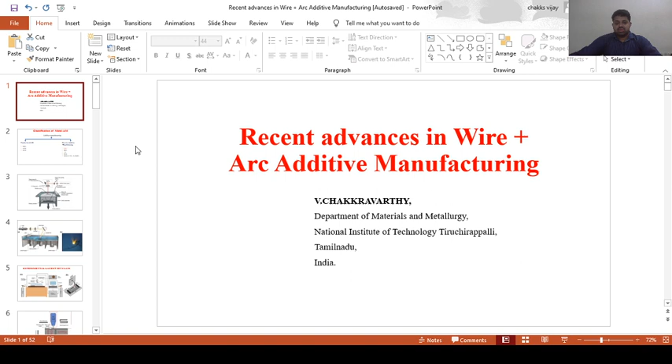This lecture covers fundamental insights into wire arc additive manufacturing, its recent advancements, present challenges, and industrial outcomes. I am V. Chakkravarthy, with the Department of Materials and Metallurgy, National Institute of Technology, Trichy. I'm not going to waste time advertising my institution, so let me quickly step into the classifications of metal additive manufacturing.

Additive manufacturing is just an umbrella term. Metal additive manufacturing is broadly diversified into two types: powder-based additive manufacturing, and wire arc additive manufacturing. Powder-based additive manufacturing, as the name indicates, uses powder.

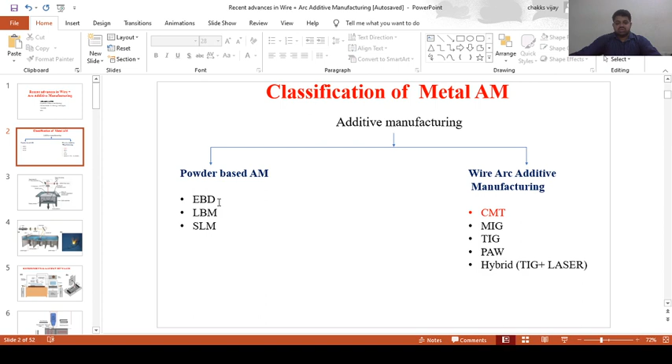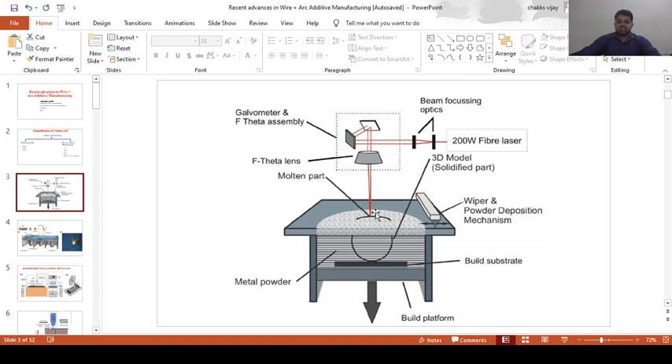A powder is spread over the table, and a laser or electron beam power source is focused onto that powder. Wherever the powder is exposed to this laser power source, those areas get melted and solidified to form the exact component. You can observe that for making a very small component, how much powder is practically needed. This is how powder additive manufacturing generally works.

Out of all these areas, only very few areas are exposed to the laser. Only those areas get melted and solidified, and the remaining areas stay unaffected by heat. However, in the nearby zones, we can observe partial melting of powders, which may cause agglomerations that we cannot rework with that unfused powder. That becomes a potential threat.

So here we go. Now let's see what wire arc additive manufacturing is. The name itself indicates that the wire is going to be melted to form any complex geometry or complex contour.

This is how a setup exactly looks. We need a workbench, and a substrate will be there. Generally, whatever material we are going to deposit, the same material is used as substrate. For example, if you are going to deposit stainless steel 316L, then the same material should be chosen as the substrate material.

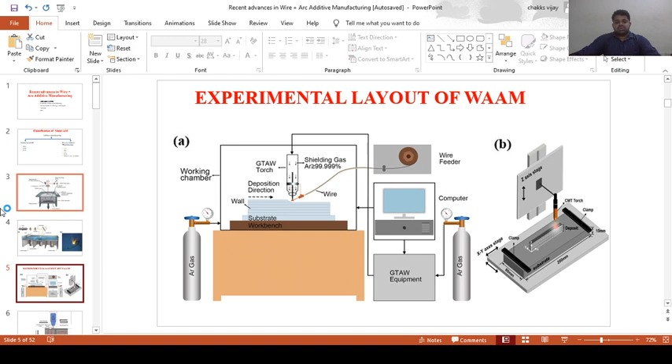The wire feeder can be done externally in case of TIG welding, or if it is CMT or MIG welding, the wire will be integrated into the torch and directly melted without any external power source such as a tungsten rod. We also have a computer to control and monitor the feedback mechanism, ensuring the torch is moving as per the programmed coordinates. This is a general overview of wire arc additive manufacturing.

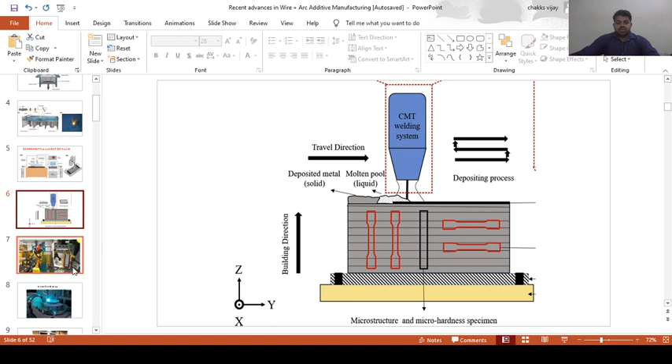Especially while building a component, we should be certain about which axis we are building in, either X direction, Y direction, or Z direction. Generally, single wall components are built in the Z direction, meaning we build towards this height. Here we can see the experimental layout.

Let's see how exactly a wire arc additive manufacturing setup looks. Here we can see cold metal transfer based additive manufacturing. That welding machine is interfaced with the robot. This robotic arm could potentially move in all degrees of freedom.

Here we can observe some base plate attachment. These base plates are clamped with this kind of fixture, so that it can avoid thermal distortion. That will be covered in upcoming slides.

Here we can see a magnified image of how the table exactly looks. In this table we'll be fixing a base plate and clamping it using this kind of fixture, and this wire will be coming through the wire feeder, and directly it will be deposited over here.

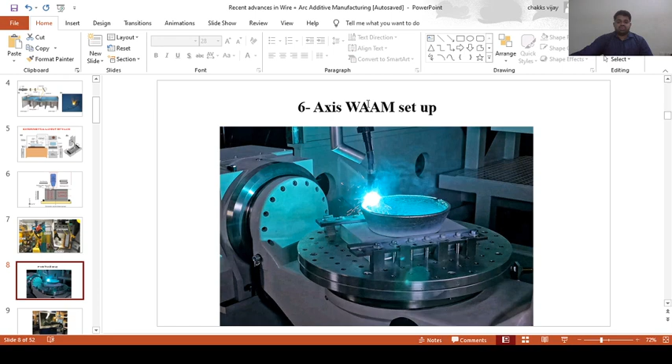In case you are dealing with tough materials like titanium, magnesium, copper, or magnesium aluminum, such sensitive materials, then we have to go for a closed chamber, where this chamber will be completely filled with argon gas or even helium gas at a very high pressure, so that there won't be any possibility of interacting with outside gases, especially during deposition. So we won't face any kind of oxide layer formation, especially at the time of deposition.

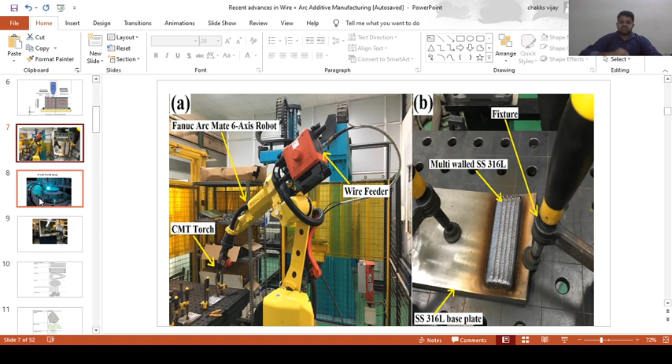Here are the path planning considerations. How a robot is supposed to move, and what paths it should travel. Each path planning strategy will impact grain refinement significantly. This path planning also impacts geometrical fidelity and the heating and cooling rates of the component. The solidification rate is completely dependent upon the tool path planning, meaning in what pattern this robotic arm is supposed to move.

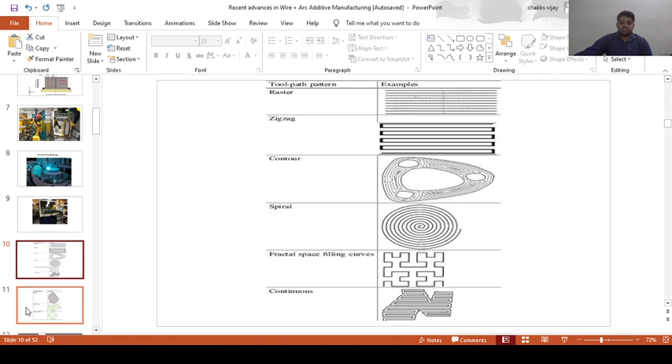There are different patterns available. Either we can go for a raster pattern, which deposits continuously without any gap. We can also go for a zigzag pattern, which is more efficient. There's also variable contouring, spiral, and continuous patterns possible. A few other patterns I've shown include hybrid pattern, MAT, and adaptive MAT.

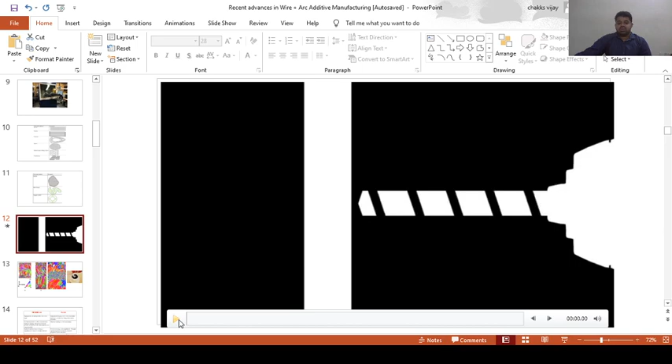Other than these patterns, one of the most interesting things about wire arc additive manufacturing is the weaving motion. Here we can see what a weaving motion looks like.

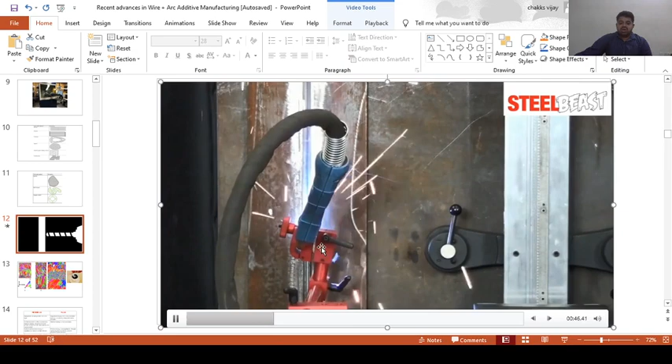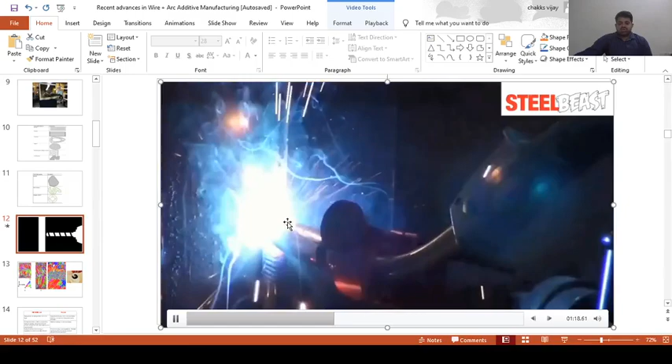Here you can observe that this torch is slightly moving right to left, left to right. This consistent movement can easily be observed. Especially whenever we're making this kind of weaving motion, it eventually causes a weld pool stirring, which results in fine grain formation.

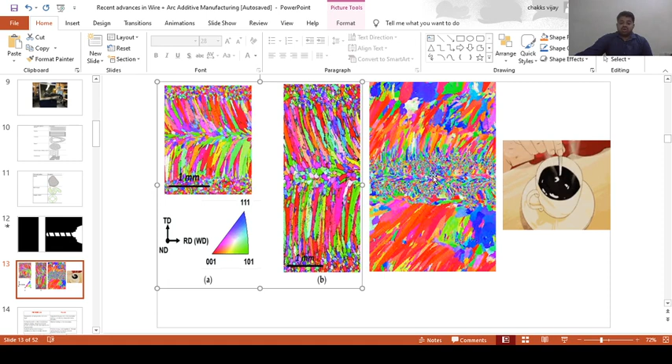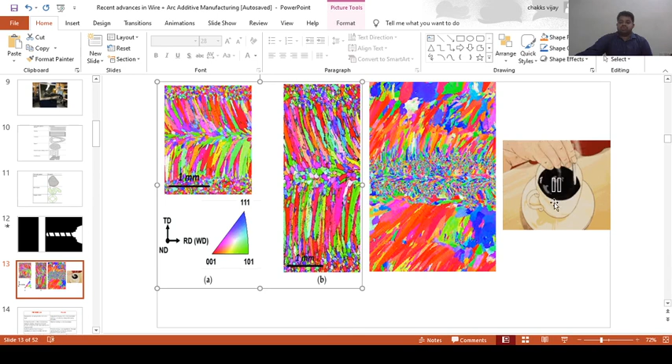Whereas whenever we go for this arc oscillation technique, shown in this video, you can observe that fine grain refinement is possible. This is nothing but weld pool stirring. Whenever you are stirring this molten pool, automatically the grains get collapsed, and it will result in finely refined grains that won't be in one particular texture. That is one of the advantageous features of this weld pool stirring.

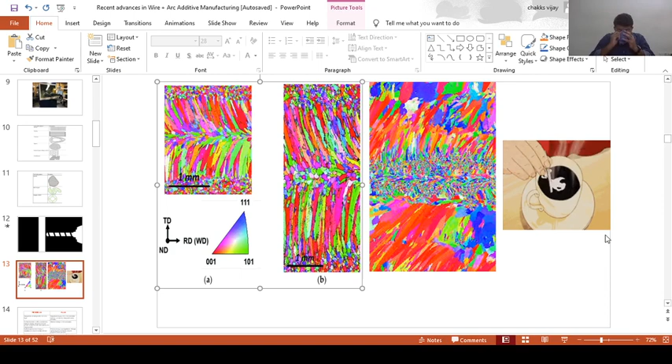Next we can see the common differences between powder based additive and wire arc additive manufacturing. In powder based additive, the cost of the powder is initially very high, and there are aspect ratios specifying what should be the specific diameter of the powder, and in what shape the powder is supposed to be, either spherical or any other regular shape, which matters a lot. As we know, with this powder, porosity will be one of the most common issues.

Whereas when we compare with wire arc additive manufacturing, we generally never bother about grain size or anything else. Whatever material we want to deposit, we can go for any simple material, like stainless steel 316L or Inconel. Anything available in form of a wire, typically we can melt those wires to deposit a component.

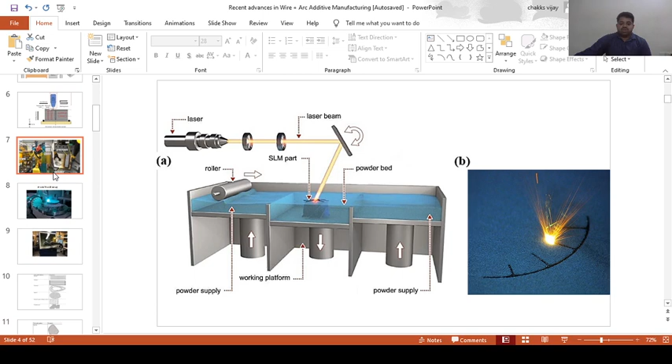So the material wastage is very minimum. Here we have observed that a very large quantity of powder will be spread just for building a very small component, even though your component may be small or big, because you need to stack this much amount of powder. But in wire arc additive manufacturing you don't need that much material, so even a minimal material is sufficient for making a component.

So the material wastage will be very minimum with wire arc, which we generally call the buy to fly ratio, because most aeronautical components are very costly. For example, titanium 6Al4V alloy is a very expensive material, so even a small quantity of material wastage matters a lot.

Buy to fly ratio means what is the actual component weight and how much material is wasted to produce this much weight of component. For example, if you are producing 2 kg, the actual weight of the component is 2 kg, but you would be wasting like 3 kg of powder to produce it, so the total would be 5 kg. That 5 kg is the buy ratio, and the fly ratio is the actual weight of the component, which is the 2 kg.

Another important thing to know is that this powder-based additive manufacturing setup is quite expensive. For example, if we need a very simple setup, we have to spend a minimum of 1 crore in Indian currency. But if you're interested in building a wire arc additive manufacturing technique, we hardly have to spend 50 to 60 lakhs. We can even go for very good 6-axis robotic machines.

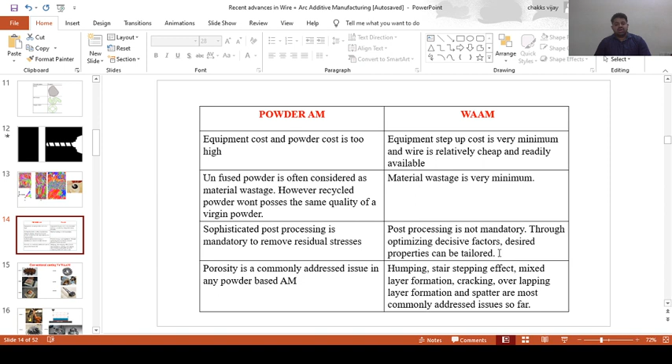But however, just like powder-based additive manufacturing, wire arc additive manufacturing also has some serious problems like humping, stair stepping effect, mixed layer formation, and a few others, which could be seen in the upcoming slides. Let me quickly step into the common differences between conventional casting and wire arc additive manufacturing.

In conventional casting, step 1 we create a pattern, step 2 we create a mold cavity, step 3 we pour molten metal into the mold cavity and allow it to solidify. Once solidified, we break the mold and get the actual component, which will be further machined and polished to meet industrial requirements. This is how conventional casting generally happens.

But here, wire arc additive manufacturing is something very different. In casting we have a static heat, this heat is not a moving heat, which is otherwise called transient heat.

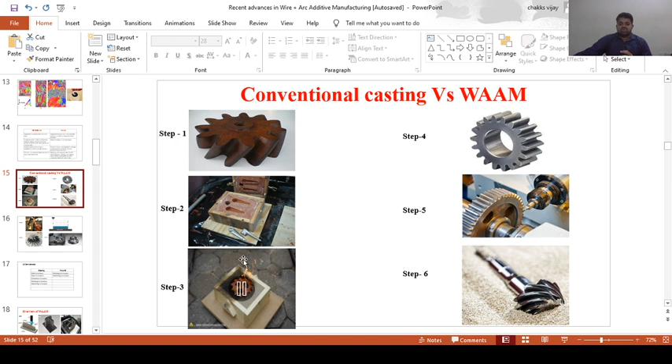In casting it is a static heat, whereas in wire arc additive manufacturing it is a transient heat, especially while depositing from one end to the other. As the torch travels, this area gets solidified while experiencing a moving heat, which is otherwise called transient heat. So the solidification rates are a little bit faster as compared to conventional casting techniques.

Step 1, we have to plan the robotic path. Once we have planned the path and set up all the x, y and z coordinates, then we'll be depositing the component, which is step 2. Step 3, we'll be removing the unwanted components, because this component has a lot of undulations that should be removed.

Most components could be used in as-printed condition, but few components may have a very stringent industrial requirement to pass through qualification. In such circumstances the component could even undergo machining, either by drilling or milling tools, or wire cut EDM, which is one of the most conventionally and often used techniques to machine these wire arc additive components. Even that could be possible to attain a high geometrical fidelity of a component like this.

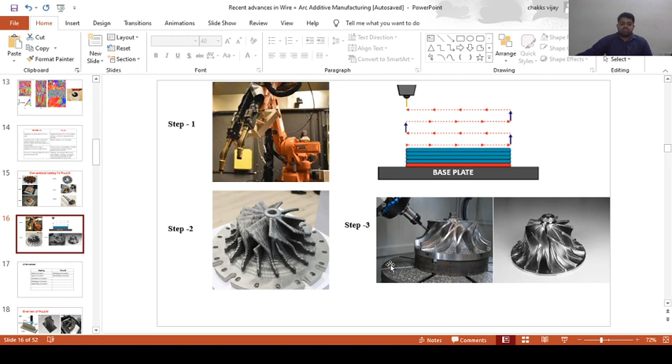So only these 2 allowances are generally considered for a wire arc additive manufactured component. Here we can see the overview of WAAM.

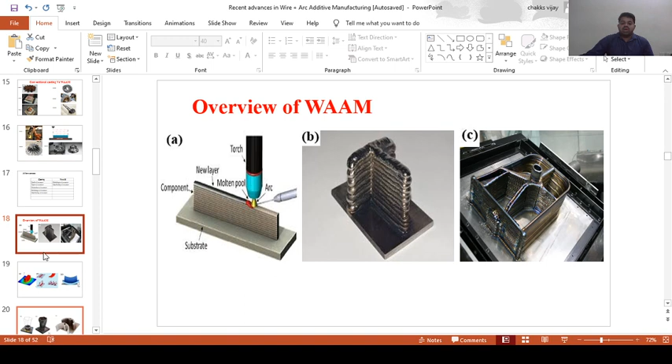Then the next step is building a component like this. After we have built this component, then we'll be doing machining as shown here. But before doing all this process, what is the first step we are supposed to do? First, we are supposed to do the simulation. Before building an actual component, we have to simulate how the heat source will be moving, and what is the possibility of evacuating the heat from the actual component.

It is nothing but the substrate, or otherwise called base plate, which is blue in color here. Generally whenever metal is being deposited, the component undergoes high coefficient of thermal expansion and thermal contraction, which leads to building of residual stress complications. Whenever the material is being melted, it experiences high coefficient of thermal expansion, and during solidification the metal experiences thermal contraction.

Repeated melting and solidification takes place, forming thermal induced stresses in the base plate, which may lead to base plate distortion. This is the most common problem, but it could be avoided by using a base plate that is slightly thick enough, minimum 15 to 20 mm thick. Because the plate is initially at room temperature, 32 degrees C, and suddenly exposed to very high heat like 1600 or 2000 degrees C, it cannot withstand that thermal shock, leading to residual stress complications and plate distortion.

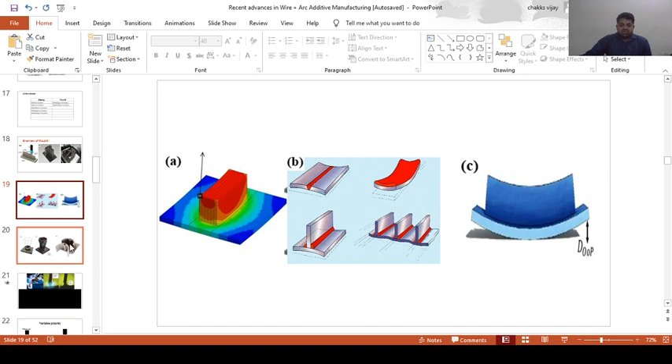After doing simulations, we have to do pilot experiments. Using these pilot experiments, we can plan how to optimize the wire feed speed, how to optimize the current, what should be the applied voltage, and what should be the torch traveling speed. Each and everything should be well optimized, either manually or through programming techniques.

Prior to that, what we generally do is 3D slicing, where the exact geometry is sliced into small segments. After that slicing, we do a modelling process. Then we come up with a simulation, and if that works exactly, we go for pilot experiments.

During pilot experiments, we may end up with spatters and irregular deposition. Each time, we optimize all the process parameters. Once all the process parameters are well optimized, we get a very fine component with very high geometrical fidelity.

Once we fabricate this component, it is machined very smoothly to attain a glossy surface. On seeing the surface initially, we cannot blindly conclude that wire additive manufacturing doesn't work; we should not jump to that conclusion. After machining, this component will look just like a brand new one.

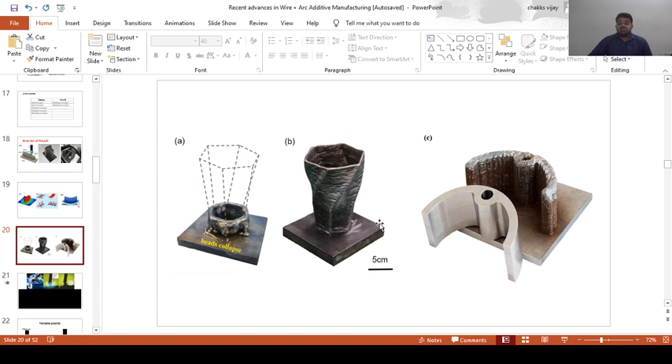As mentioned, after doing a lot of pilot experiments, we optimize the process parameters. In case of normal MIG, a conventional MIG process, we optimize the process parameters manually. Whereas cold metal transfer welding, which is a modified form of MIG welding, was developed by Fronius Technology.

This technique offers more versatility, especially for wire additive manufacturing and welding. The main salient feature of cold metal transfer welding is that each and every process parameter is synergistic in nature. For example, if I change the wire feed speed, the voltage, current, and other decisive factors will automatically change accordingly.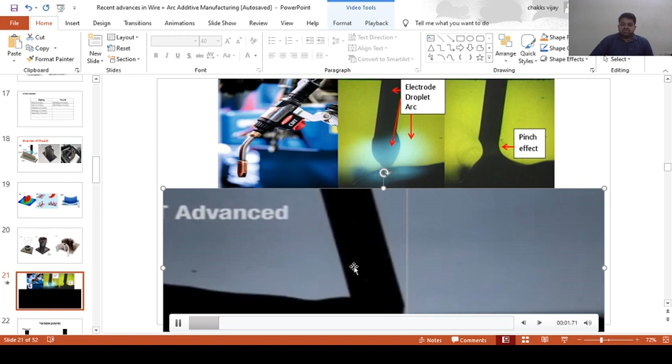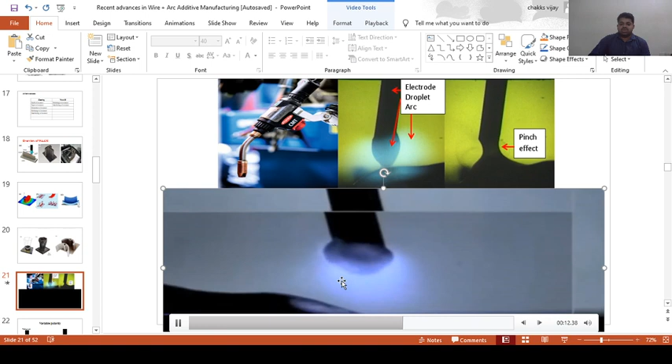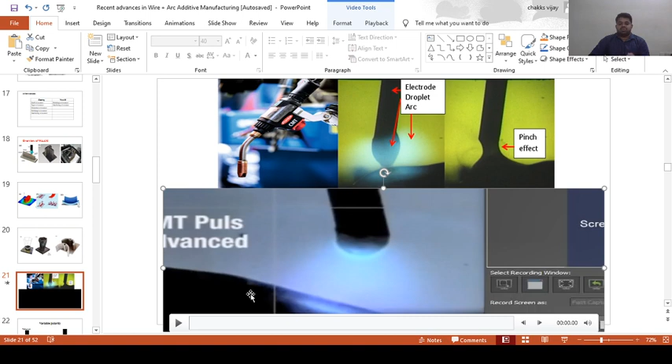Okay, so here you can see this wire is connected with the negative terminal, so it will be like detaching a droplet because an avalanche flow of free electrons will be coming out from the wire, which will result in molten pool formation. So for each and every microsecond, this molten droplet will be detached from this wire, which could be easily seen, and each time this polarity is getting changed from positive to negative and negative to positive.

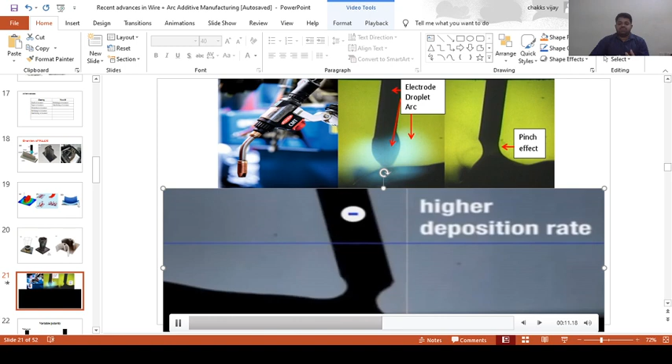So I'll let you know what is the actual reason for this kind of pulsing effect. In cold metal transfer welding, this pulsing will be more efficient, unlike other welding techniques. So this is what we generally call variable polarity, like straight polarity and reverse polarity at a time, we can make it out.

So in terms of welding, just imagine this is a CMT torch, and this is a wire, and this is a base plate. Say for example, if this wire is connected with the positive terminal and the workpiece is connected with the negative terminal, and if I'm going to make a deposition, then automatically what will happen? This workpiece will be having some oxide layers which I could not potentially remove through the wire brush. If I'm removing through the wire brush, then it may lead to scratches or undulated surfaces, which I don't like to happen. I like to remove all these oxide layers at an atomic level.

So what I'll be doing is connecting it in reverse. I'll be connecting this workpiece with the negative terminal. Wherever I have connected anything with the negative terminal, the free electrons will try to jump out. So this free electron - generally the oxide layer will be deposited on top of the surface. These free electrons want to jump outside, but this oxide layer creates a hindrance. So what will happen? A hammering effect will take place. So just consider this oxide layer - the free electrons will give a hammering effect, and try to jump out from the surface of the metal, which will lead to the removal of the oxide layer.

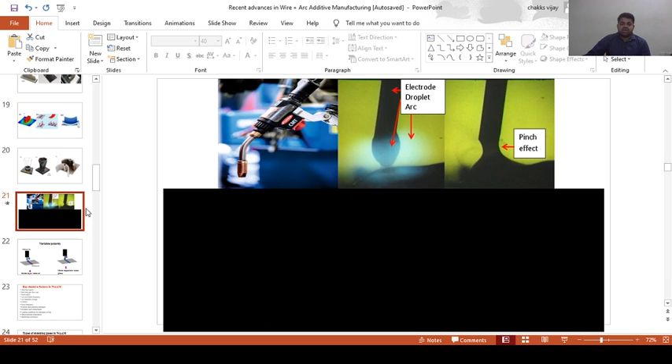So everything happens in microseconds, which we generally call pulsing. So in one half of the cycle, deposition is made, and in the other half, oxide layer removal is taking place. Whenever the workpiece is connected to negative, oxide layer removal takes place, and whenever the electrode is negative, metallic deposition takes place. So for every microsecond, one half of the wave is metal deposition, and the other half is oxide layer removal. So two things occur in parallel at a time, which we generally call pulsing.

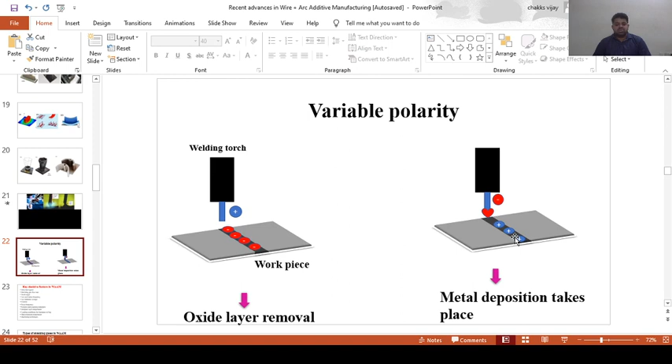So this CMT, cold metal transfer welding, has a very special feature called pulsed advanced mode. Using this pulsed advanced mode, you can avoid porosity, and also deposit spatter-free material, and also remove the oxide layers, especially at the time of deposition itself. So that is another advantage of the process.

So here we can see what are the key decisive factors of wire arc additive manufacturing. The first thing we have to worry about is the wire feed speed - how much should we fix it? In case of cold metal transfer welding, once we fix the wire feed speed, all the other decisive factors will be fixed accordingly. Whereas in case of other techniques like plasma or MIG, we have to fix each and every process parameter ourselves, by doing manual optimization or well-developed optimization techniques. So that's wire feed speed.

Then the second most important one is the shielding gas flow rate. Then the third one is the torch angle. This shielding gas flow rate is very important, because if you are using a shielding gas with a very low flow rate, then it would not be sufficient to shield the molten pool. So obviously the weld puddle will result in oxide layer formation. If it is a more sensitive metal like aluminum or titanium, then shielding gas is very important - the metal will have discoloration. The metal color will get changed to chocolate brown, which indicates that an oxide layer has already formed.

If for each and every time we cannot simply remove by means of a wire brush, which is very time consuming, we generally have to give a very high flow rate, like 20 liters per minute. In that kind of high shielding flow rate, we generally go for that.

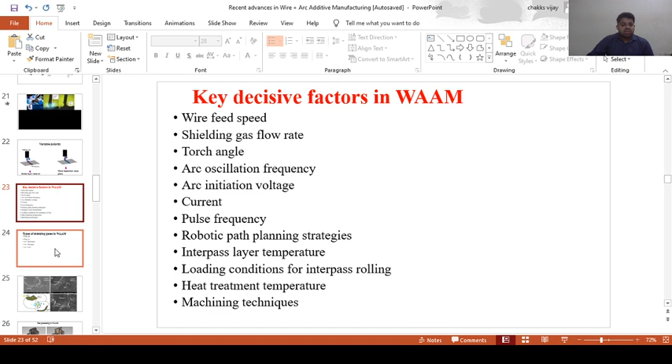So here I have mentioned what kind of shielding gases we generally employ. Either we can go for pure helium, or argon, or argon hydrogen mixture, or argon nitrogen. These are generally classified as metal active gases, because hydrogen, nitrogen and CO2 are the most active gases as we've heard.

How much hydrogen can we use? Generally we can go for 1 to 5% of hydrogen along with argon - argon will be 95% and hydrogen within the range of 1 to 5%. Nitrogen also would be at the same level, and even CO2 also at the same level.

And this argon nitrogen - what is the use of argon nitrogen, especially when we are using austenitic steels? Austenite phase is a very unstable phase, so austenite may convert into ferrite. So we may use a lot of austenite stabilizers such as nitrogen - nitrogen is a very good austenite stabilizer - or nickel. In certain circumstances, nickel is a very strong austenite stabilizer.

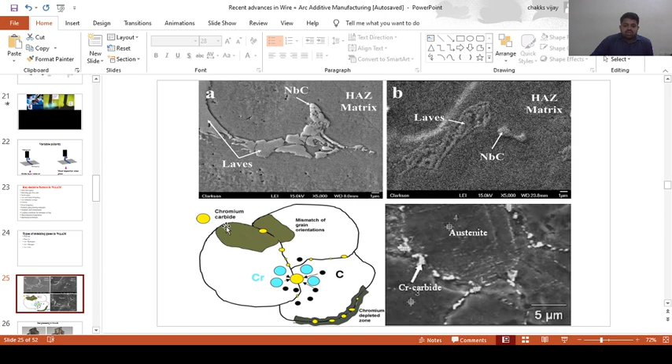Here you can see the metallographic structure. Especially in scanning electron microscope, we can observe each and every single grain boundary. This is a grain boundary you can observe, which is the outer area. Inside is the grain, and the outer one is the grain boundary.

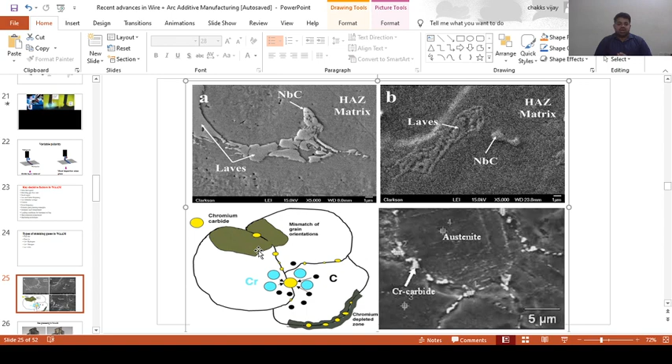Especially during solidification, whenever solidification is very sluggish - as compared to powder additive manufacturing, wire arc additive manufacturing solidification is very sluggish. For example, if you consider powder based additive solidification rate, it will be in the range of 10 power 6 or 10 power 5 Kelvin per second, because very high heating and cooling rates take place. Whereas in wire arc it is quite sluggish, hardly 100 to 500 Kelvin per second, not more than that. During such circumstances, the grain becomes more coarsened.

When grains become more coarsened, what generally happens? Just imagine chromium is present all over the grain. Some quantity of chromium will be leached, and this chromium will form a globule and react with the carbon to form chromium carbide. This chromium carbide is an unwanted element which causes a lot of deleterious effects, such as embrittlement - your material will turn brittle, and wherever chromium carbide formation is present, it acts like a crack nucleation site, so cracks can easily penetrate from there. That's why we generally avoid chromium carbide formation, which is popularly called the sensitization problem.

If we want to potentially avoid chromium carbide formation, we have to use certain shielding gases like argon nitrogen. When we use argon nitrogen, this nitrogen reacts with the carbon because the reacting temperature is very high, forming nitrocarbides. Once nitrocarbides are formed, there won't be any free carbon left to form chromium carbide. So when chromium remains high in your stainless steel, it becomes more corrosion resistant, and you won't face this sensitization issue. So shielding gases are one of the most important considerations.

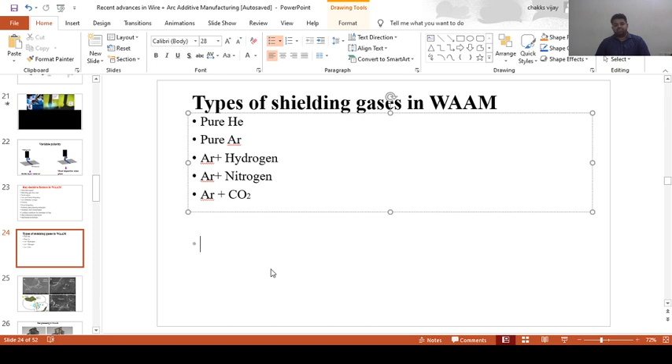Here we can observe this kind of Laves formation. This Laves formation is nothing but a hard niobium shell, inside an irregular L-shaped shell. Inside this shell, a lot of potential minerals are entrapped, like molybdenum, chromium, and even few other materials entrapped inside this hard martensite shell. Obviously it leads to demineralization, which may cause easy corrosion attack.

This could be avoided by increasing the cooling rate of the material. If you want to increase the cooling rate, we can either pour liquid nitrogen into the molten metal so it gets rapidly solidified, or else pass external air so that these wire arc additive components can be easily solidified through faster heat dissipation.

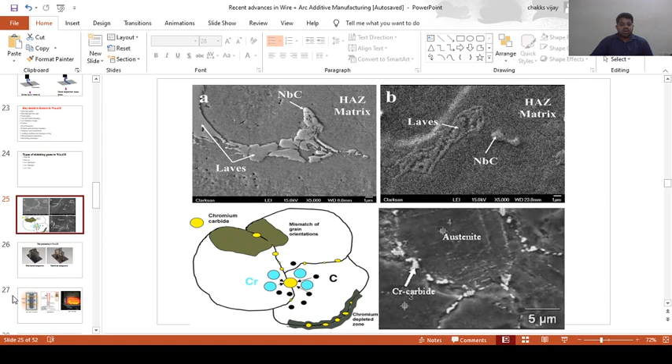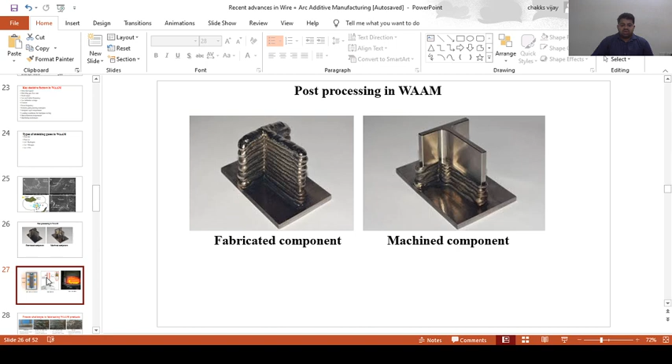Then mostly we never go for any kind of heat treatment, especially with wire arc components. But however, if we go for very high heat input, there may be chances of residual stress formation, which may be due to the building of very high thermal gradient.

So in certain circumstances we generally go for hot isostatic pressing, but this is restricted with wire arc, because most articles mention there is no appreciable effect of hot isostatic pressing with wire arc additive components. However, this is more effective with powder based additive components.

Then the other important thing is shot peening. In this technique, an ultrasonic transducer will be hitting the workpiece, which is like a hammering effect. Due to the shot peening effect, a lot of the open porosities get closed, so a lot of compressive residual stresses build up in the component, which is more favorable for tribological and corrosion resistant applications.

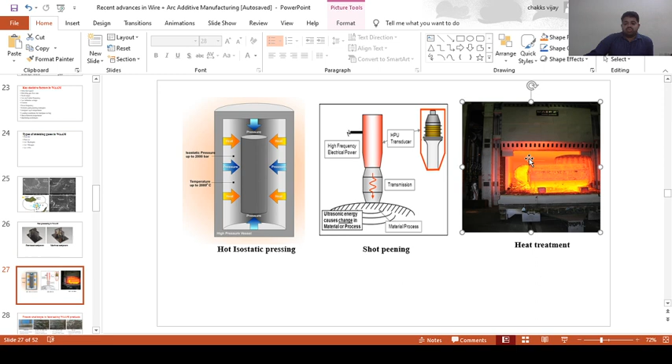Then the other important thing is heat treatment. We generally carry this out in a furnace to certain temperatures, which is also one of the post-processing techniques we often do to remove the residual stresses present in the component.

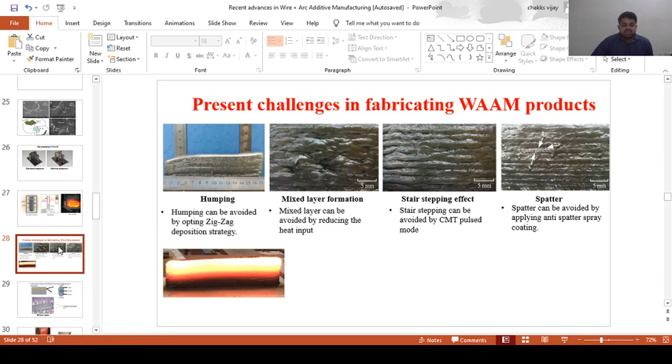Either we can go for rolling operation, or else we can go for a small coating of materials like niobium, or use a grain refiner such as titanium. Such powders could be coated by means of a paintbrush or something else at the end of each layer deposition, so that grain coarsening could be greatly avoided in the dilution zone, because titanium is a very strong grain refiner, which will increase the surface wettability and promote the solidification rates, which will catalyze that.

So generally we go for niobium or titanium nitride. These are the potential grain refiners we can use. We can simply coat these potential grain refiners, especially at the end of each layer deposition. After the end of each layer deposition, this titanium nitride is coated, and again this deposition is made. So especially at the interface area, we will be having fine grains.

Here I have shown what are the various grain structures available. Most metals fall under these four categories: either planar, cellular dendrite, columnar dendrite, and equiaxed dendrite, or else pure planar, cellular, columnar, and equiaxed. Generally it falls under these four categories, or sometimes this dendrite formation might be unavoidable. It is completely based on what is the thermal gradient to the growth ratio.

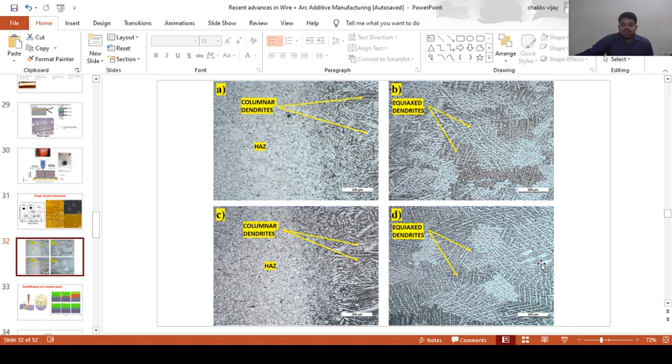I will show you exactly how an equiaxed structure will look - so here you can see now, this is how an equiaxed structure will be looking. Columnar dendrites will appear in this way, here in this diagram you can see some columnar dendrites. This is how a cellular morphology will be looking - here you can see now the cellular morphology. This is how a typical microstructure exactly looks.

Here you can observe the equiaxed structure, here you can observe the columnar dendrites, and the cellular structure we can observe over here. So it is based on the heating and the cooling rates, based on the thermal gradient to the growth rate. Growth rate is nothing but the grain growth velocity. Based on these two phenomena, we will be getting a variable grain structure.

Grains, like every plant, will try to grow towards the sunlight. If the sunlight is at a 30-degree incline, plants will grow in that particular direction. If the sunlight is straight, the plant will grow in a straight line. These grains are very similar to that.

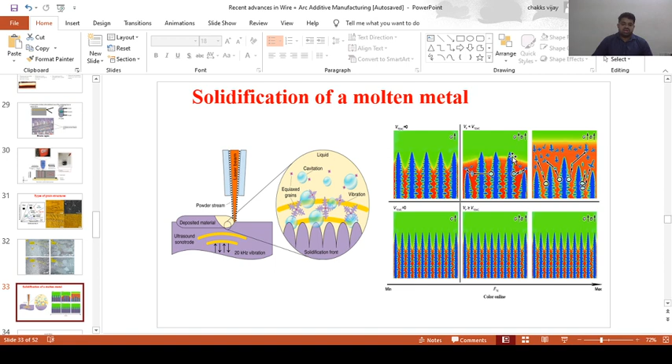Wherever the heat dissipation rates are very high, in that particular direction your grain will try to grow. So it's up to you in what direction you are planning your grain to grow. You have to cool your sample rapidly in that direction, so the grains will try to grow in the fastest heat dissipation direction. That's one of the most important things I'd like to touch upon.

This orange area represents semi-molten state material, which we generally call the mushy zone. This orange area, the mushy zone, will eventually get solidified. This is how a microstructure generally looks.

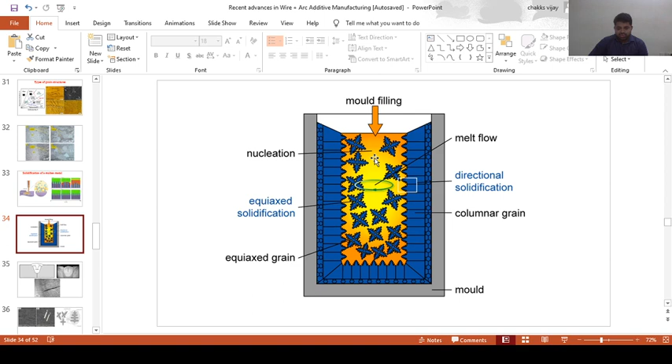Generally, if we are using aluminium, we go for an aluminium silicon wire to weld aluminium. Why? Because silicon reduces the melting point of aluminium and improves surface wettability. Better surface wettability results in more interdendritic liquid formation, and when there is more interdendritic liquid, it can potentially heal all these cracks and voids very effectively.

That's why we generally go for aluminium silicon wire, like ER4043. ER represents the electrode wire, and 4043 is the aluminium 4043 series, known as a universal filler wire. For welding any grade of aluminium, we go for ER4043 because its aluminium silicon combination improves surface wettability, making the interdendritic liquid content very high so it can heal all cracks and voids.

If your material has insufficient interdendritic liquid in this orange zone, it may lead to this kind of cracking formation. To avoid that, we need more surface wettability, so we can go for titanium, which improves surface wettability, or titanium nitride, or even niobium, which also improve surface wettability. We can use such potential heterogeneous nucleates as grain refiners.

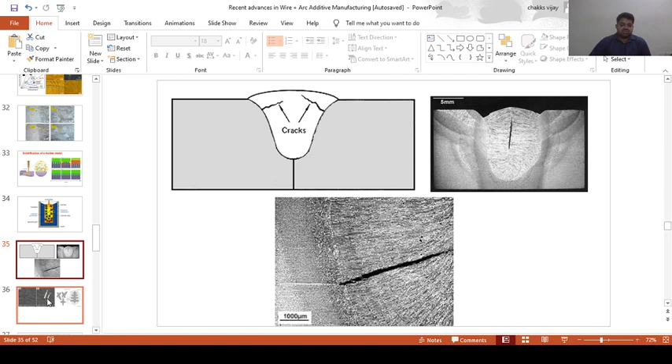How do we predict the cooling rates in wire arc additive manufacturing components? That's one of the important hot topics—by means of secondary dendrite arm spacing. As I've told you about the various grain structures like columnar, dendrite, planar, and cellular, mostly this columnar dendrite structure will generally be present.

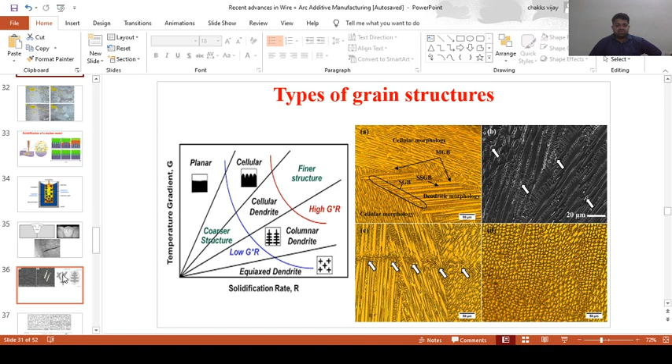If the arm spacing is very high, it means the solidification rates are very sluggish because your grains are overgrown, which is why the arm spacing becomes high. But if the arm spacing is very congested, say around 10 micrometers or 5 micrometers, it means your grains are very fine in size.

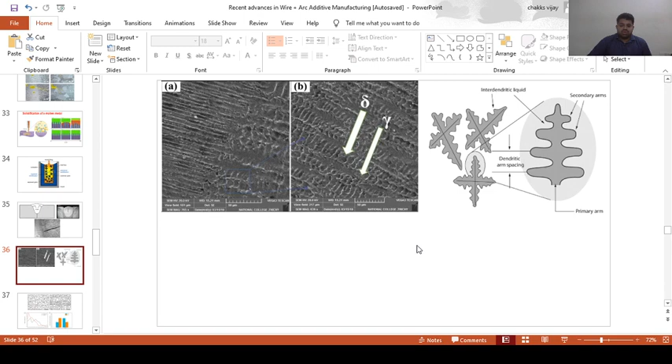Based on the secondary dendrite arm spacing, we generally determine how far the solidification rates are. Just for knowledge, I included this slide to show how far this grain refinement could be possible.

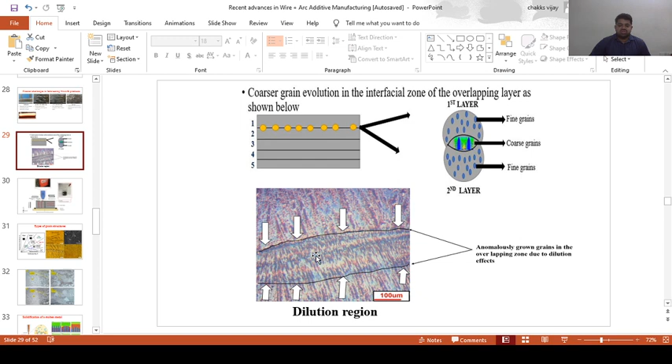Especially at the interfacial region, you can observe this kind of coarser grains. Here, the interfacial region is there, so in the interfacial region, coarser grains are developed.

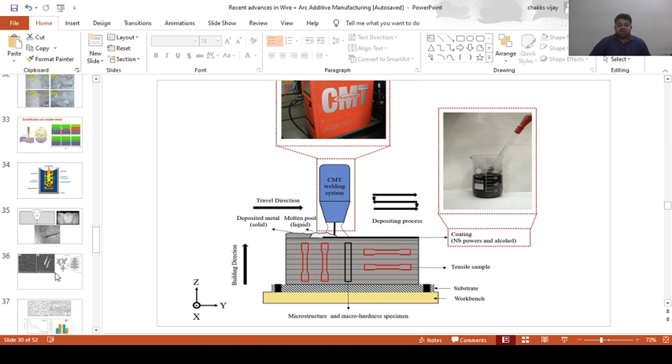So whenever we are using this kind of niobium coating or something else at the end of each layer deposition, you can avoid this coarsening effect. Here you can observe at the interface a fine grain configuration, especially at the interface area.

So this is the interface. In the interface also, coarser grain only is there without niobium powder. After depositing each and every layer, if you are depositing this niobium layer, then obviously the interfacial zone will be having fine refined grains. That is one of the key advantageous features.

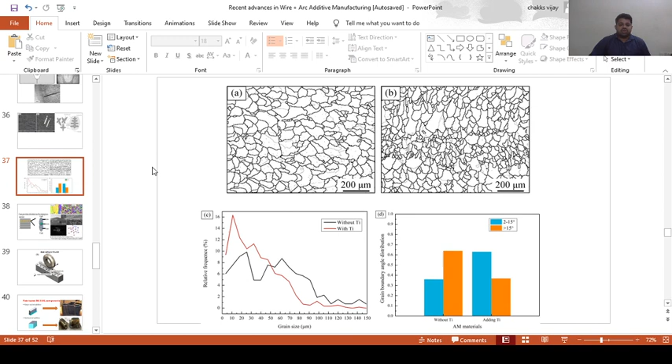This titanium is one of the most potential grain refiners, as I told you earlier. It is pure aluminium. If you are adding a few quantity, just like 1% or 2% of titanium, then all the coarser grains are getting refined into a finer grain.

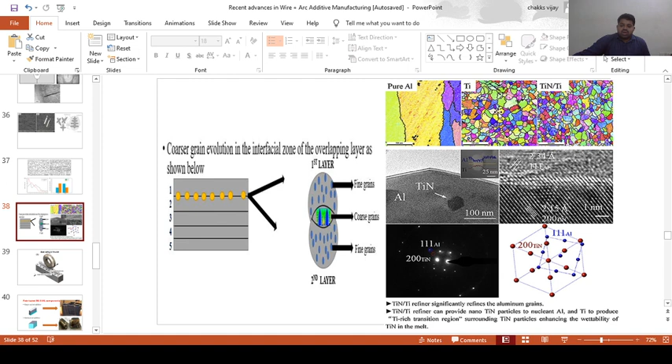If you are using titanium nitride, which has very strong potential heterogeneous nucleation, it can refine very fine grain. So that could be possible. Either we can use this kind of grain refiners, or else we can go for this kind of rolling operation, which I was supposed to discuss earlier, but this slide came a little bit late.

So this rolling operation, after the end of each deposition, will be performing this kind of rolling operation by applying a very high rolling pressure like 80 kilonewton, 100 kilonewton, 200 kilonewton. We will be applying a very high rolling pressure, so that without any kind of grain refiners, this kind of grain refinement can be possible.

Especially during cold rolling operation, the coarser grains will get crushed, and it will be forming a very fine grain structure. However, one of the most important things is this roller will be dissipating the heat, especially from the deposited area, so faster heat dissipation could be possible, and even coarser intermetallics could be broken into finer fragments, so grain refinement could also be made.

But one of the most important things which we should consider is that giving excessive rolling load will lead to tearing of layers. So only optimal rolling load should be applied. That should be given more significance.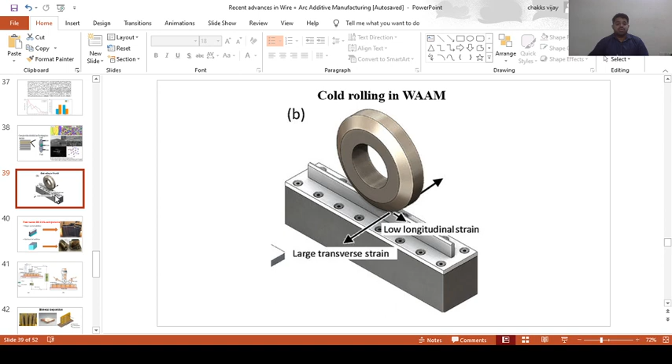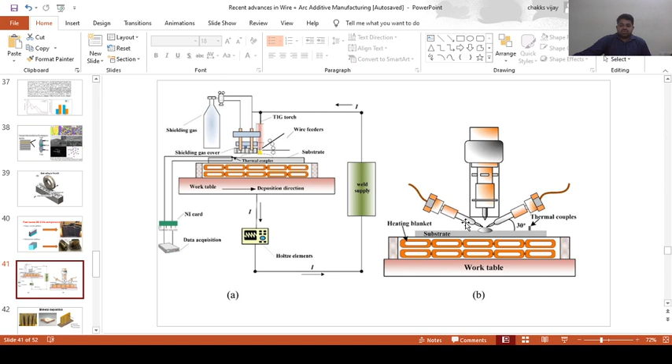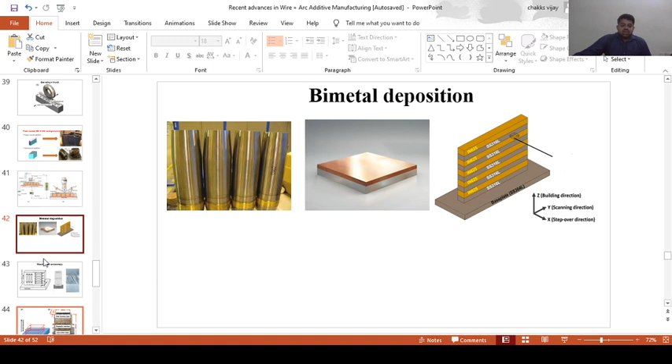Then one of the most important points we should know is mechanical anisotropy. Anisotropy is a common term, meaning change in any property with respect to direction, which we generally call anisotropy.

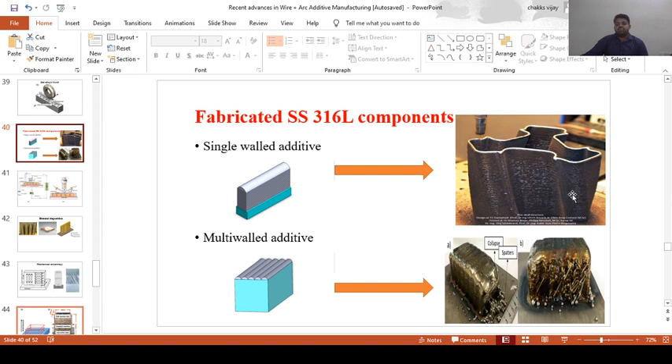Equiaxial morphology will have the highest micro hardness compared to other grain morphologies. So with different grain morphologies present, we get variable mechanical properties, variable corrosion resistance, variable micro hardness, and other variable properties, generally based on what kind of grain morphology we have obtained.

Generally we will get a mixed structure, not everywhere equiaxial or everywhere columnar dendrite. So everywhere it will be a different grain morphology, which results in this kind of mechanical anisotropy. If we want to overcome this, we have to play with the deposition strategy.

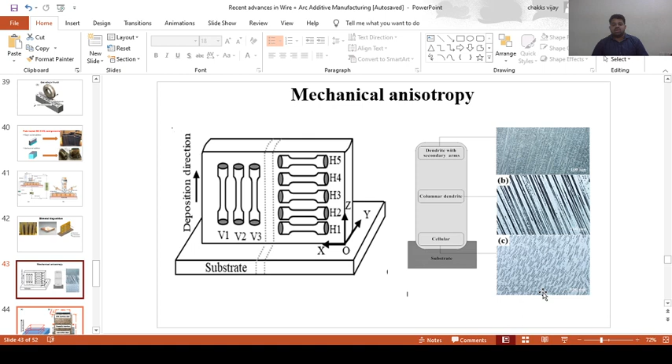We can go for different deposition strategies, like planning a zigzag pattern, a raster pattern, or even an adaptive pattern. Different planning can be made so that coarser grain formation could be greatly avoided, and we can obtain a homogeneous grain structure. To attain that, we have to play with path planning strategies.

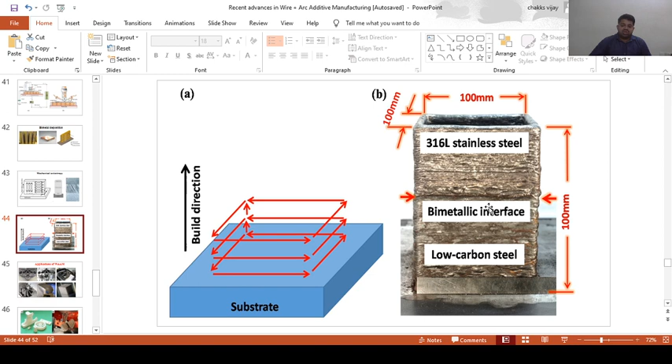Here I have shown different bimetals - stainless steel 316L and low carbon steel - deposited over here. This is nothing but a bimetallic interface, so even one or two materials could be deposited with each other, which we generally call bimetals. Here we can see some applications of WAAM.

It is not yet being used in a commercial way.

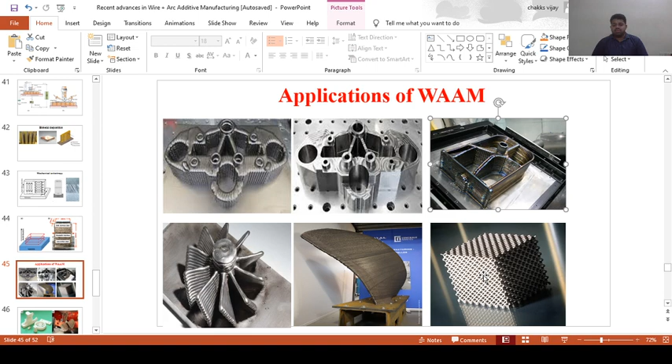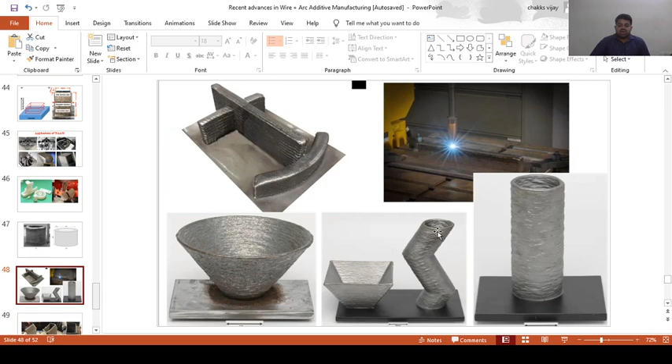Here we can see some other applications as well. Let me quickly rush through due to time constraints. We can even fabricate overhanging structures or something like this. These are the potential applications of wire arc additive manufacturing.

This one is one of the propellers which we use in a boat, for steering and rowing the boat, we generally use this.